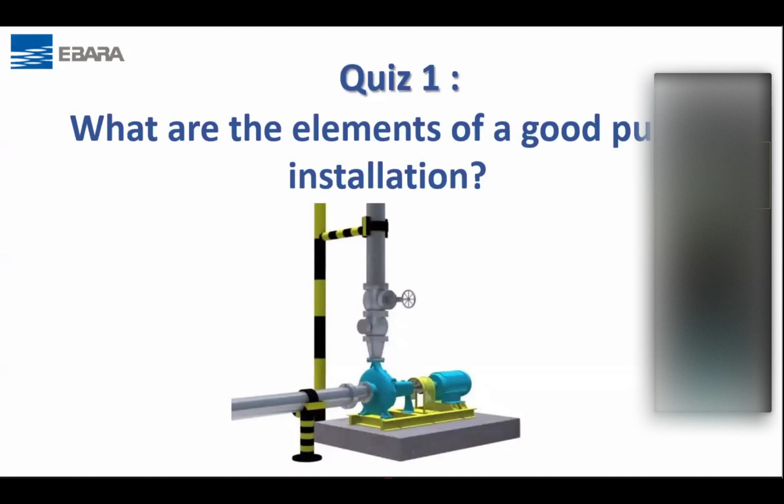Now you can see an example, or rather a clue here as to what makes a pump installation. So now let's go to the topic. When it comes to the correct installation for a pump system, there are 3 important points to take note.

Okay, the first is what we call the pump foundation, and this is basically the support for the pumps that you are installing. Secondly is the piping arrangement and how the pumps are connected to the pipes, both suction and discharge. This is also important in the whole pump installation scenario to ensure your pumps will run well.

And thirdly, as what you answered, pump alignment - that basically means how the pump connects to the motor. So these 3 factors, when done correctly, will allow your pumps to have the best conditions for its performance and ensure that it will perform at its peak efficiency. Correct and proper pump installation practices can mean the difference between a pump that gives many years of trouble-free operation or one that requires constant and repetitive maintenance - you end up keep having to maintain or service the pumps very frequently because of poor installation.

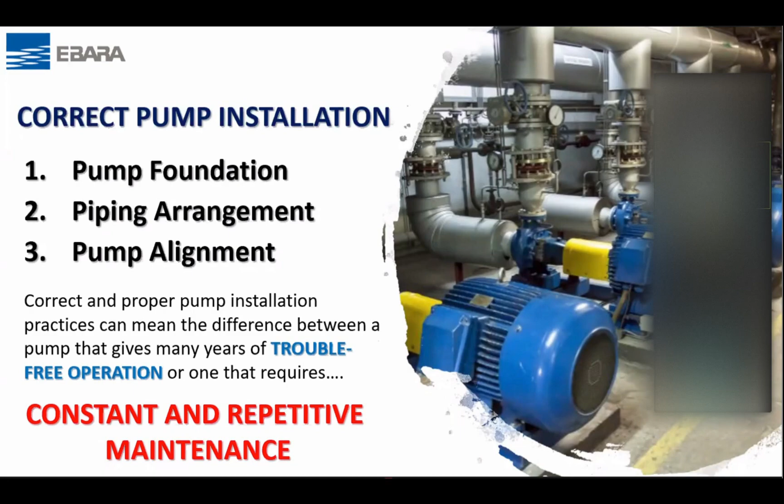Now let's go a bit deeper, let's start with the pump foundation. This is an example of one of our installations in one of the water treatment plants. There's a simple saying: a good house must be built on a strong foundation. This is the same for a pump, and even more so, because the pump generates dynamic outward forces in its operation. Therefore, it is important that the pump must be well supported.

Now let's look at what happens when a pump is running. When a pump operates, due to the centrifugal action of the pump, there are many forces and thrusts at play. The pump is subjected to centrifugal forces when the impeller is turning, and at the same time, the liquid action generates both radial and axial thrust from the pump. All these forces and thrust have to be taken up somewhere.

Now, in our last two webinars, we talked about Newton's laws of motion, and basically, as long as there is an action, there is a reaction. So this is where the reaction of the forces from the pumps come into play. Whenever there is a centrifugal force acting, there will always be a reaction acting towards the motor, which is the axial thrust, as well as the radial thrust.

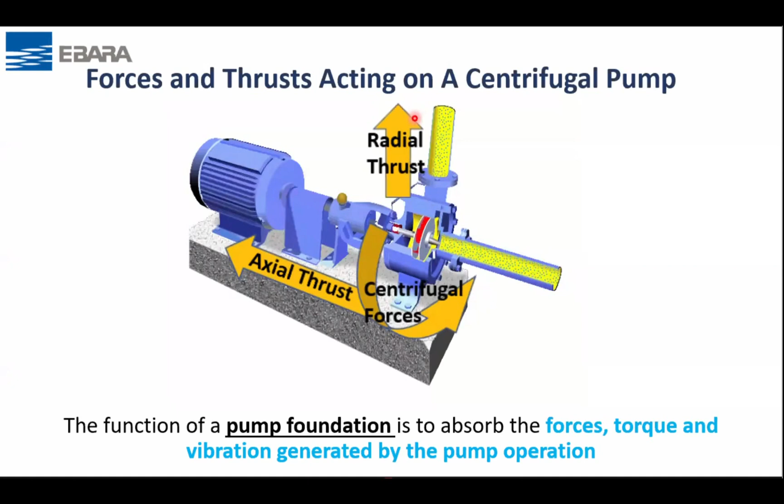Horizontal pumps such as end suctions, split case, or horizontal multi-stage types of pump should be mounted on a strong steel base plate supported by a strong concrete foundation, like what you see in some of the pictures here. The steel base plate is like the feet of the pump and motor assembly. It has to be designed to take up not only the weight of the pump, but also allow the whole assembly to be carried or transported around.

Now, you may ask, can the steel base frames support the pumps without the need for a concrete plinth? I'm sure you have come across some installations where there was no concrete foundation and the pump is just mounted directly to the floor. If the pump is light, such as a small close-coupled pump or a small vertical multi-stage pump, then it can be mounted directly to the floor. However, for horizontal style pumps, a good foundation is required to absorb these dynamic forces as well as ensure that vibrations are not transmitted to the floor structure.

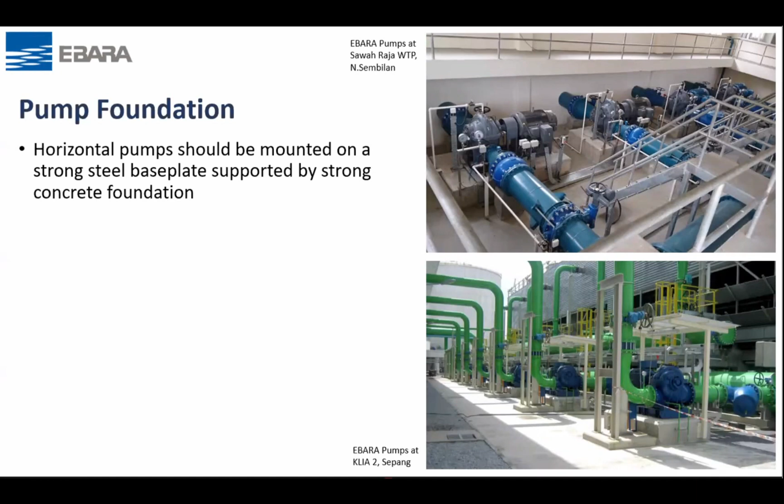So the rule of thumb is that the concrete foundation must be around 5 times the combined weight of the pump and motor to effectively absorb the dynamic forces. This can be calculated easily by assuming a concrete density for the plinth of around 2,400 kg per cubic meter, and from there you can determine the size and height of the foundation easily with this method.

And not forgetting, always design for ample working area around the sides of the pump and lifting tool facility also, such as a chain hoist and even cranes for larger pumps for future maintenance works. You can see from the pictures in the slides some of the good installations in projects we have supplied, and I would say this is very commendable.

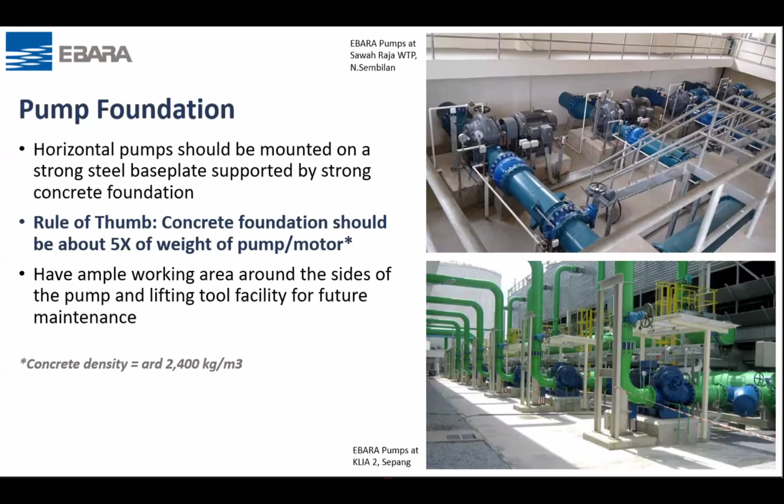Now, another important consideration, especially for pumps that are inside a building, is the isolation of vibrations, which can affect the surrounding areas and in worst cases transmit through the pipings. These vibrations can create cracks within the wall and floor if it's too much, and also create leaks in the piping system over a long time.

Therefore, inertia bases and spring isolators like what you see here in the picture can be used to counter these effects. And in some locations where there could be seismic movements—meaning not quite an earthquake, but places where there are bound to be some seismic activity—for example, if you are designing for a high building in Kota Kinabalu, which had some cases of minor earthquakes before, these isolators will definitely be required.

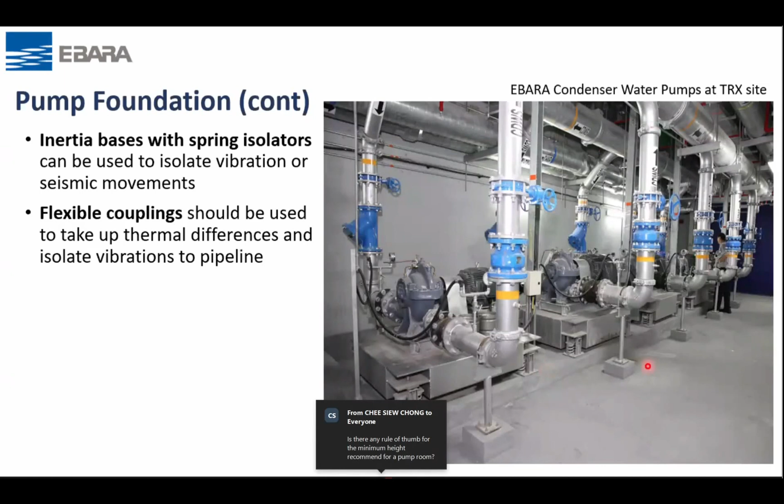Flexible or expansion joints are also a good method to isolate some minor vibrations from the pipe as well as compensate for thermal differences. There are quite a lot of types of these, so it is also recommended to apply them to your piping system. Inertia bases and isolator springs have to be sized against the weight of the pump, and this is a very specialized calculation, so there are specialized suppliers for this type of product. We will not cover this in detail here.

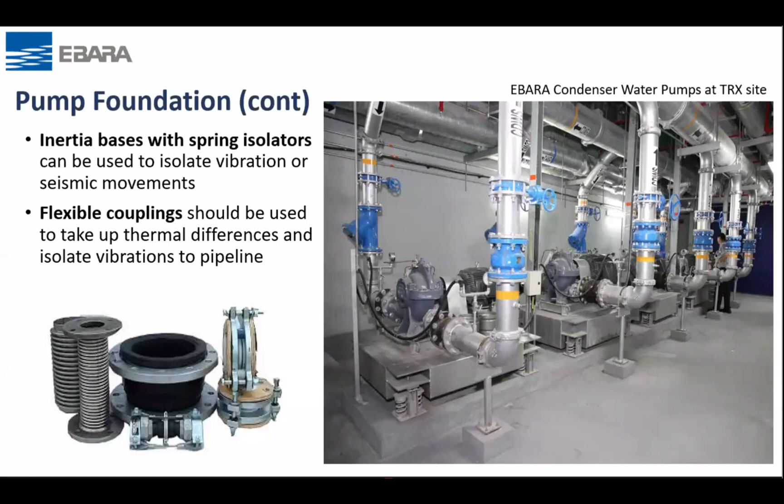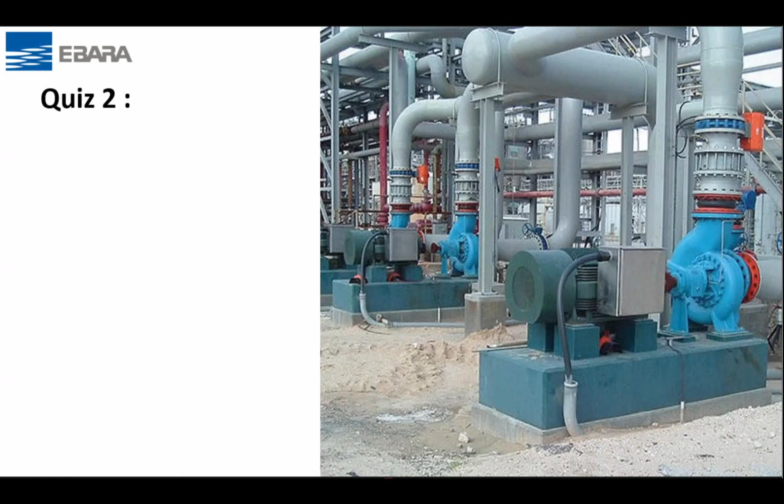So the next quiz, this is to enhance your understanding. You see from the picture here a pump facility that is still under construction. What should be the theoretical load mass for the concrete foundation plinth of a pump and motor that weighs around 1,000 kg or 1 ton? Anyone have any good answers?

Yes, very fast, thank you. Who got the first answer? 5,000 kg? Muhammad Ezwan. Okay, thank you Muhammad Ezwan for listening. You got the answer right.

So it should be around 5 times the weight of the pump and motor. And if you were to calculate the size of the plinth, you just divide by 2,400 and you get about 2.1 cubic meters. So with the height and the length, you can determine the width and length, or determine the height of the plinth. This is just a rule of thumb calculation—there are a few other factors, but generally with this method you can get the plinth size. So thank you, Muhammad Ezwan.

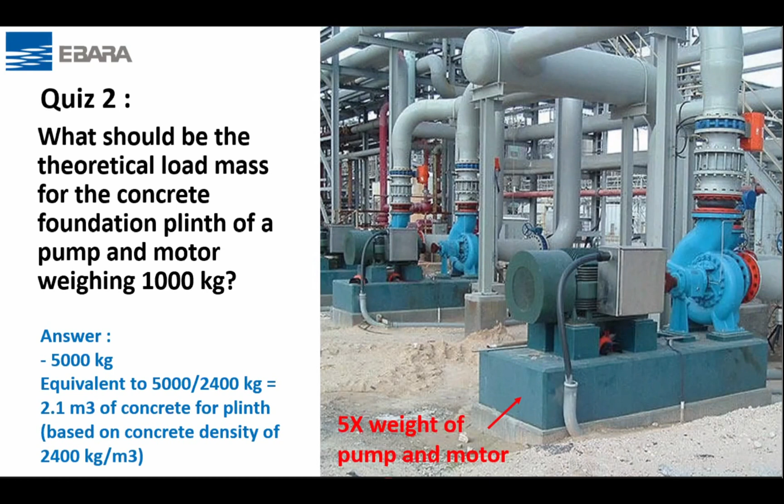Okay, so that's the answer to quiz number 2. Now next is what we call good piping arrangement. We have covered good foundation, now we talk about good piping arrangement. So what do we mean by this? Basically, how the pipings are connected to the pump will affect how the pump performs.

At the suction side, the pump needs to have a good intake of the fluid so that it can have the capacity to produce the flow and head required. And at the discharge, there should be no restrictions or any form of obstructions which can cause a large pressure loss or even back pressure acting back on the pump. Sounds simple, right? But this is where a lot of things go wrong. So let's look at this in more detail—what do we mean by maintaining an optimal pump suction condition?

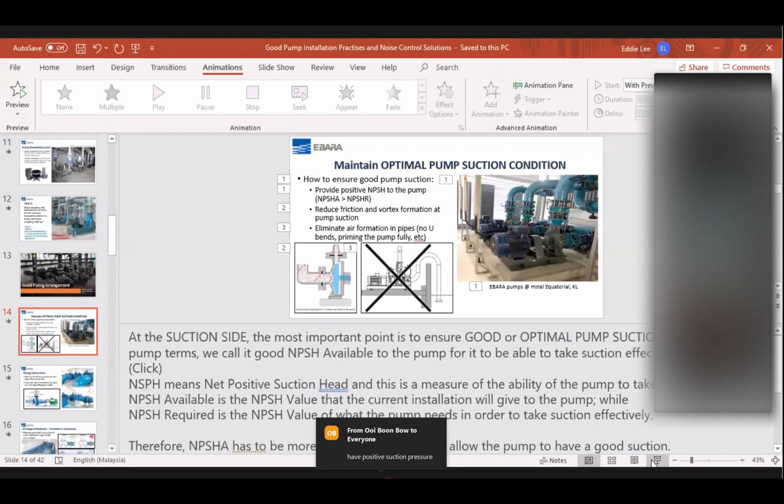So maintain optimal pump suction condition. At the suction side, the most important point is to ensure good or optimal pump suction condition. Now, in pump terms, we call it good NPSH. NPSH means net positive suction head. So basically, it is a measure of the suction ability of your pump.

But NPSH has two forms. One is NPSH available, and that is basically the NPSH value that the current installation of your pump will give to the pump. But at the same time, every pump has its own NPSH required, which you can check from the pump curve. NPSH required is the NPSH value that the pump needs in order to take suction effectively.

So with this understanding, the available NPSH in your installation or pump system - meaning your piping, your water level whether it's positive or negative, your pipe length and so on - will affect the NPSH available given to the pump. The available value has to be more than the required value in order for the pump to take suction effectively. Apart from that, it's also important to reduce both friction and vortex formation at the pump suction.

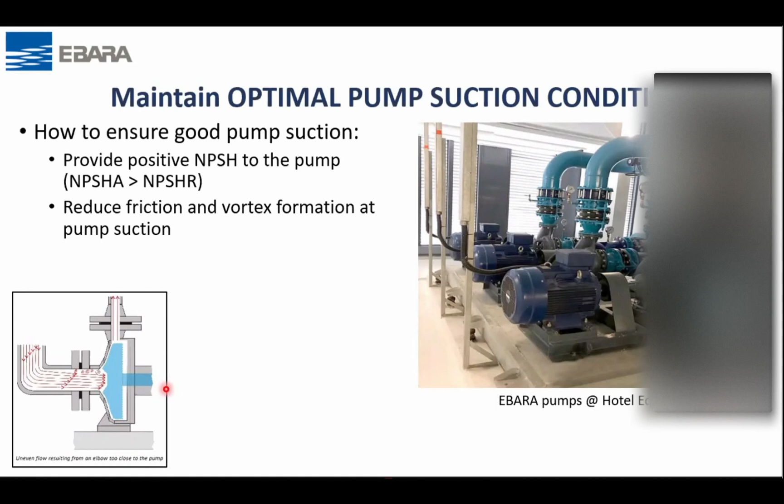One of the common problems is when you have an elbow just at the suction of the pump with a very sharp or small radius. What can happen is a lot of turbulence before the suction of the pump, which reduces the NPSH available and causes poor suction condition, even cavitation. If you have a very long pipe from your tank to the pump with high friction losses and a small pipe, that is also a condition that can cause poor suction.

And not only that, air locks - it's important to eliminate air formation in pipes. One of the problems people don't realize is that if you have a U-bend before the pump, it creates an airlock issue. So it's very important that a centrifugal pump must be fully primed to ensure that the pump takes suction at all times.

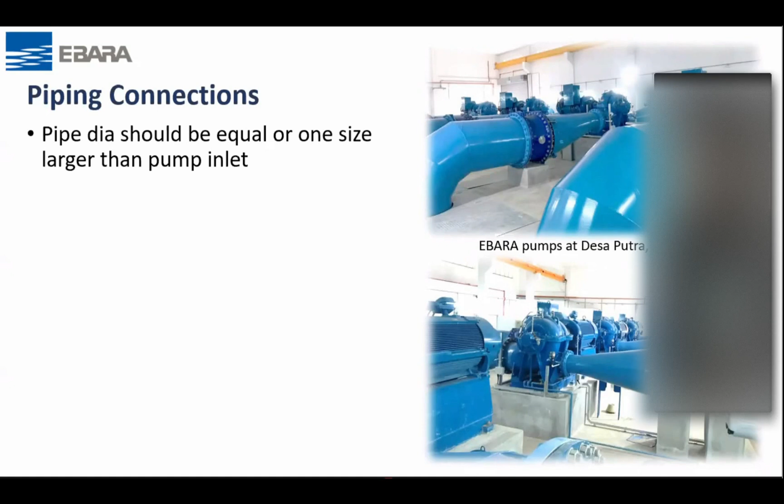Now let's go to the piping connections. After foundation and piping, now we talk about these piping connections. Pipe diameter should be at least equal or one size larger than the pump inlet - it can never be smaller, because when the pipes are smaller than the pump inlet, that is where the pump will face suction issues. The pump's inlet and outlet have been designed by pump engineers to have a certain flow into the pump, so you should never compromise on that. In short, pipe diameter should be equal or one size larger to allow for ample water supply, and also ensure the pump is not strained by the pipes and not supporting the pipe weight itself.

You can see in many cases when the pipes are installed or connected to the pump, instead of having a free connection, the pipe is actually straining to hold against the pump or vice versa, and that creates a lot of pipe strain. So all pipes must be supported by pedestals or even pipe hangers if they are running below the ceiling, and not let the pump take the weight of the pipe.

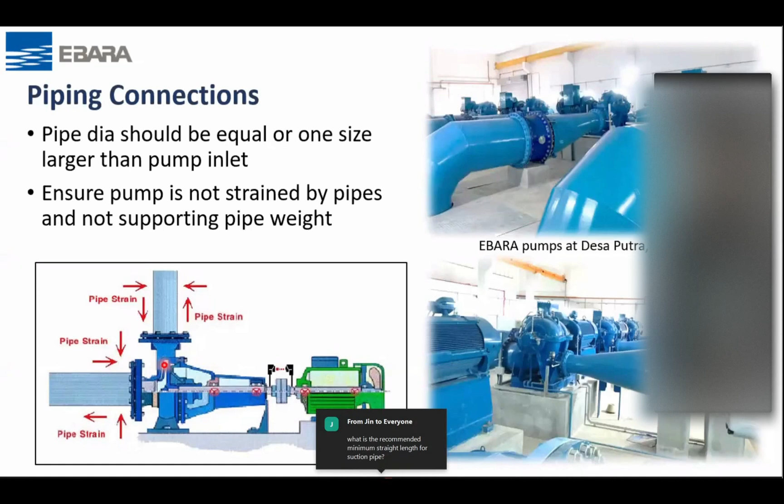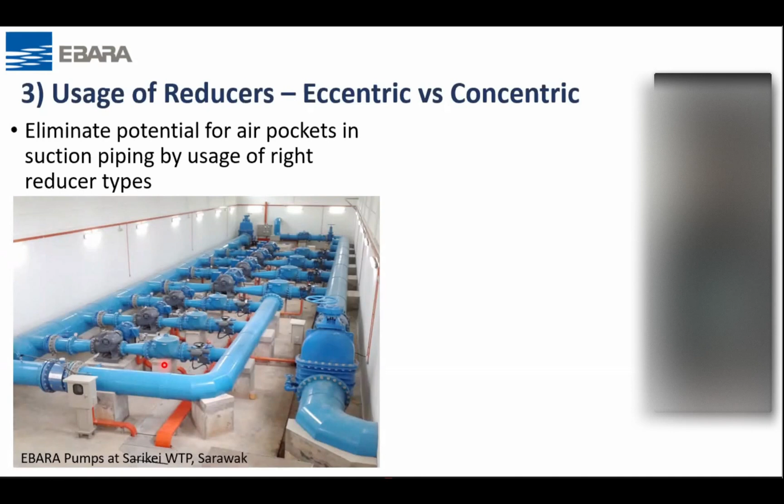Then the next is also on reducers. Now, in a lot of supply systems or plumbing systems, reducers are used. So it's important that when you use such reducers, there are both eccentric and concentric reducers, and there is a right way and a wrong way to use them.

So you can see from this installation here how the correct way of using both an eccentric reducer and a concentric reducer. In this case, for an eccentric reducer, the slope must be at the bottom part, not at the top. Because if you put the slope on top, there will be a risk of air formation in the pipe, which can affect the suction of the pump.

In another case, if your pipes are coming from below, then the slope should be below. But if your pipes are coming from the top, with a very big radius elbow, then technically the slope part of the reducer should be on top. So this is just some of the theoretical or good design practices of using both eccentric and concentric reducers.

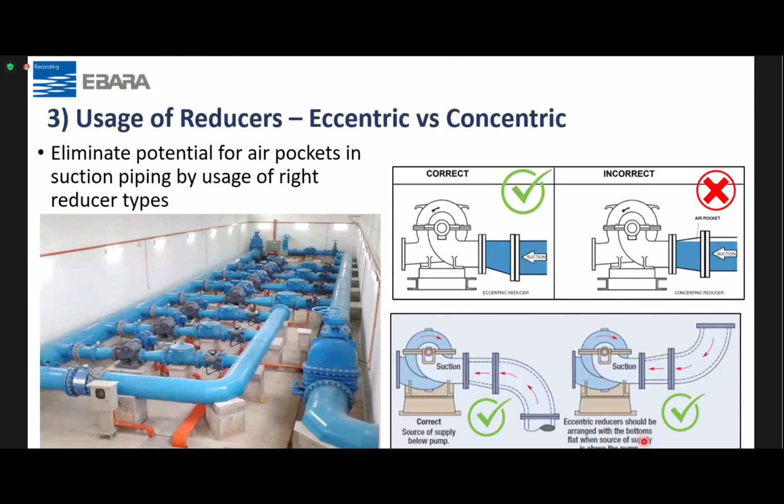So that's on piping arrangements, some of the pointers. Now we go to the next topic, which is on good pump alignment. This is also very important because all rotating equipment needs to be balanced as well as aligned to the motor correctly, not just aligned radially but also axially, to ensure that it rotates smoothly at high speed.

This is the same like your car. If your car wheels are not aligned properly, you will always have a little bit of vibration in your car when running along the highway, and the road holding will not be good, and you may not even be going straight if you let go of your steering wheel. So that's a sign of not good alignment.

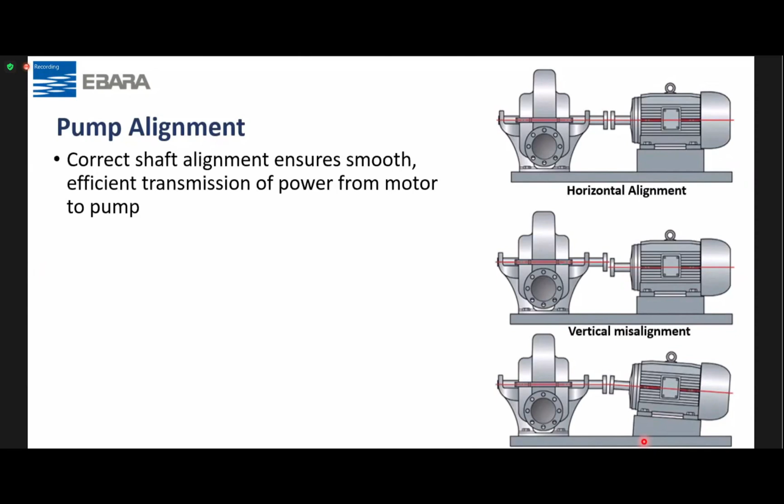But a misaligned or badly aligned pump and motor will result in three things. Number one, vibration, which leads to noisy operation and causing pipe strains. And in the worst case, bearing and internal parts damage. So in short, to avoid this, both motor and pump should be aligned properly and periodically in all your installations.

Now, there's a few types of alignment from what you can see in the picture here. There's horizontal alignment, where the alignment of shafts is in the horizontal plane. And there's also vertical alignment or misalignment, where the shaft of the motor and the pump is misaligned and shifts from each other. This is usually caused by a difference in the height of the pump and the motor.

And angular misalignment, you can see from here what happens is that it could be the pump or the motor tilted from one another, and from there misalignment happens. So the question is, when do we know the pump needs to be aligned? What are the symptoms that you can see or feel?

So let's just see a short educational video on this, courtesy of a specialist company that deals with pump alignment.

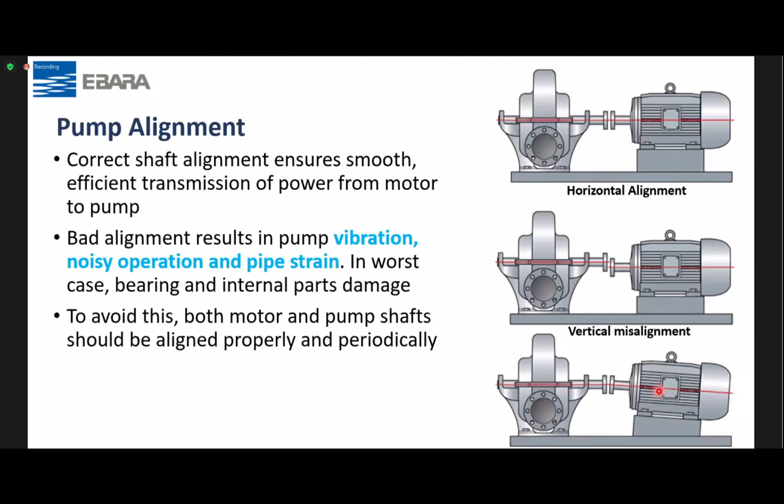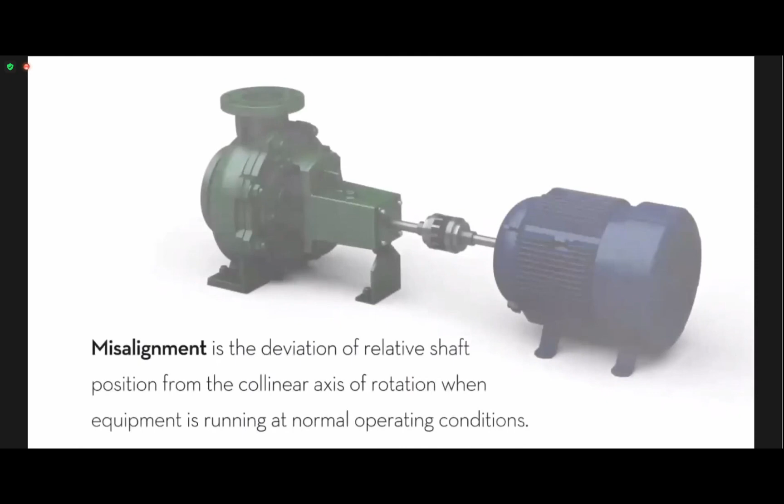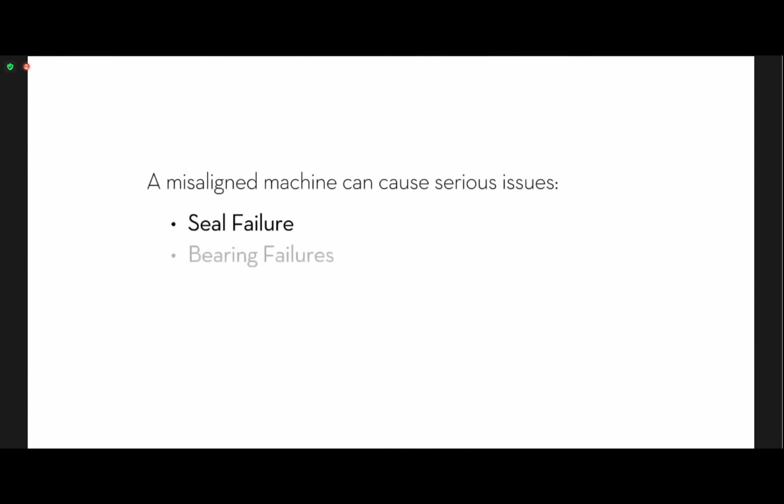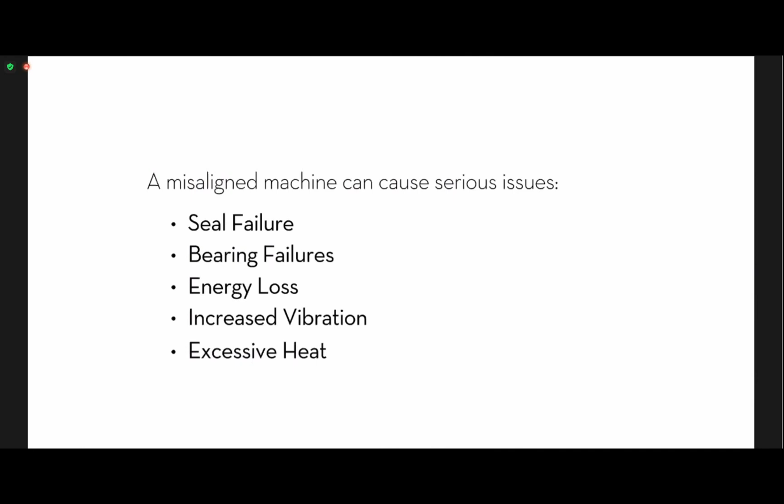So let's go to the next quiz now, and this should be quite obvious. Prepare your keyboards. The question is, what are the symptoms of bad alignment on a horizontal type pump, like for example an end suction pump? I want two answers, and I think I saw two: vibration and noise. Okay, who got the first one?

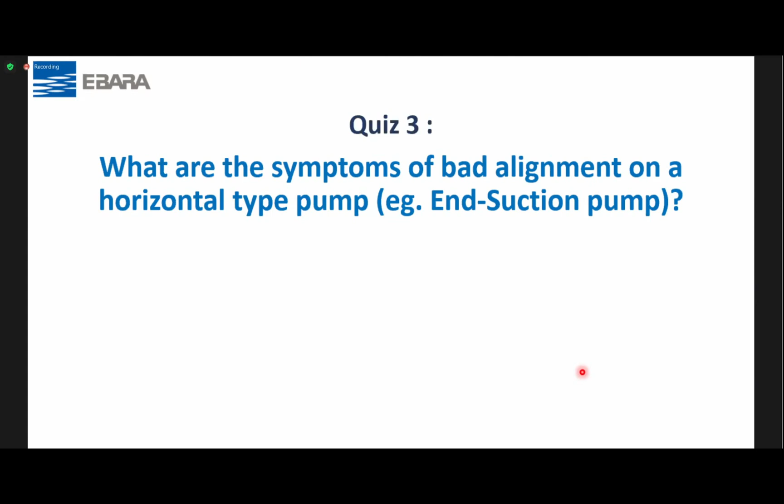So on that, we have covered what we call the essentials of a good pump installation. Now let's go to the next subject matter, which is regarding pumping system noise control solutions.

Now, before we go into this, let me just take a quick survey. How many of you all have come across this problem? Type yes in the chat column. That means either your client, maybe the building owner or developer, or even the residents themselves complain about the excessive noise from the pumps, because either their unit is near the pump room or maybe they have very sensitive ears, and even if they live further up, they can hear the sound. And sometimes it may not even be the sound of the pumps, but actually from the pipes, so you could hear chattering or water noise or even water hammer. So type yes if you have had this problem before.

Okay, naturally pumps are loud. Well, yes and no, but thank you for that comment. Are there a lot of yes? A lot, okay good. So how was the problem resolved? Can someone share, those who have had this problem, what happened, or what did you all do to solve the problem, or was there a solution at all?

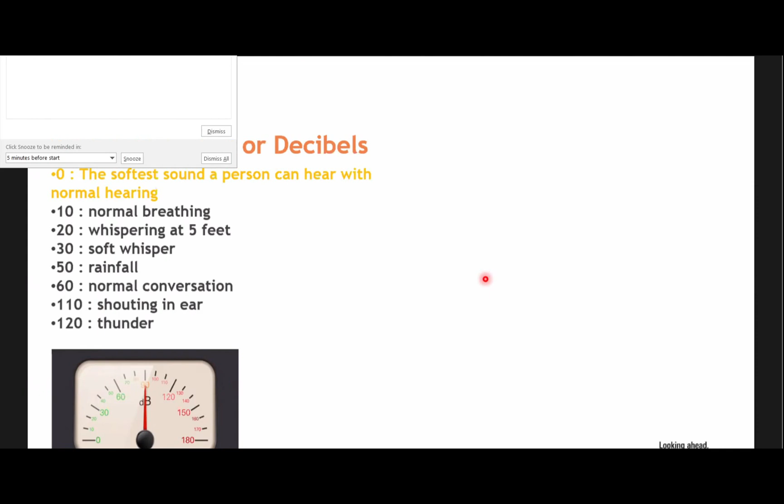So we can just go through this quickly. Your phone can become a sound meter. Just so you know, you need to apply this, and you can just do that to specify the loudness of a sound for your standard.

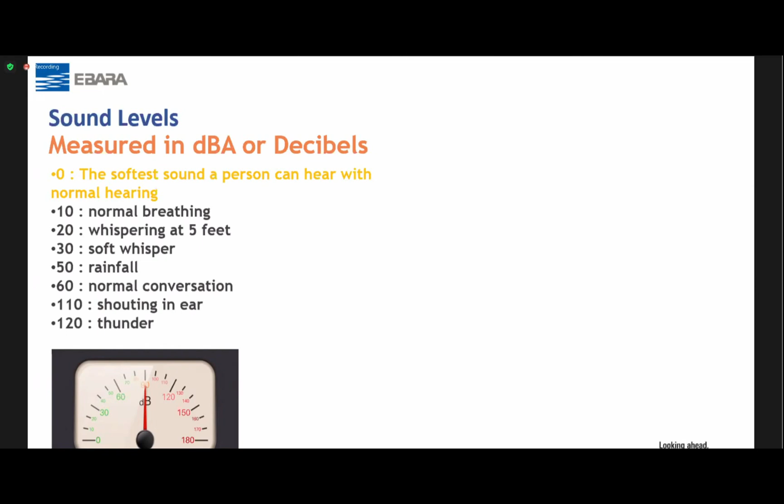So now you can really see here the different levels of decibel values, depending on your scenario, whether you're at home or at work, and whether you're using a washing machine or air conditioner.

And even here, I put it, if you are at home, for you men, if you have a nagging wife, then the sound level could be 80 dB. Or if you're in the office and your boss is very angry because you made a big mistake, it could be everything up to 90 dB.

So you get the idea, okay?

Basically, 20 dB, for example, is not double of 10 dB, but many times more, following the logarithmic scale. I will not go too deep into this, but basically it means that it is not a linear value. A sound measuring twice the level of another would actually in practice be many times the intensity level of the other.

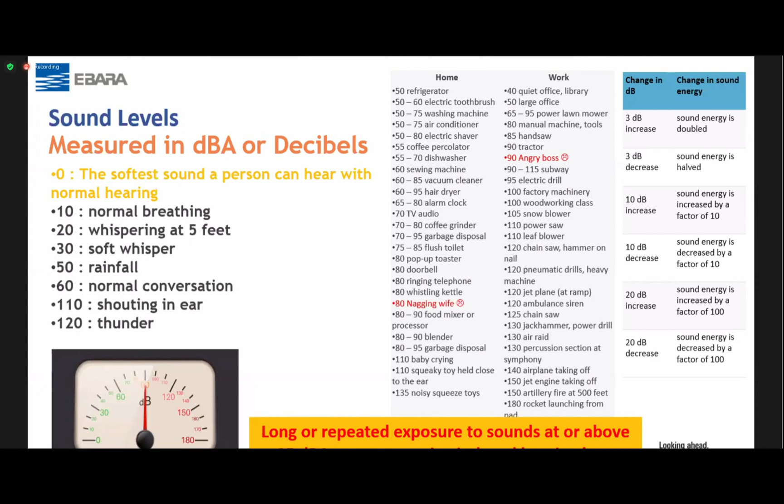But coming back to this, let's go into the next quiz. Who or what was the unit decibel named after?

This one I don't think you all will get it so fast. Anyone? dBA? No, Mr. Decibel.

Okay, yes, I got that, but you didn't get the full name, huh? I saw an answer there, but can you give me the full name? Alexander, that's not the full name either. There's a lot: Alexander Tan, Alexander Chong, Alexander... Yes, okay, we have to give this to Muhammad Kamaru, Alexander the Great. Oh sorry, I think you watched too many Netflix.

Alexander Graham Bell. So, yes, now...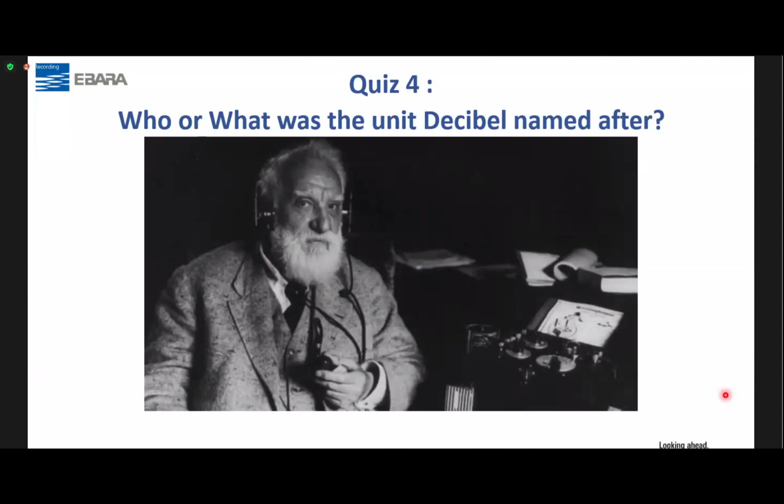Why or how was the decibel named after Alexander Graham Bell? Alexander Graham Bell, as you know, was a Scottish-born inventor. And of course his greatest work is the invention of something all of us have today, yeah? And that is your phone. Of course, he did not create the handphone, but he created the telephone.

Once he invented the telephone, engineers needed to be able to... after that he formed AT&T, and of course AT&T is one of the biggest phone companies in the world, at least in America in the heydays. I'm not sure about now, but once the telephone was created, engineers needed to be able to quantify these audio levels in telephone circuits.

And also measure the transmission efficiency of all the telephone facilities. So they had to create these measurement values. Bell Telephone Laboratories devised this sound measurement unit and named it Bell, in honor of Alexander Graham Bell, who invented the phone.

So that's just the story. But basically, the decibel is actually 1/10 of a bell, to give it more value.

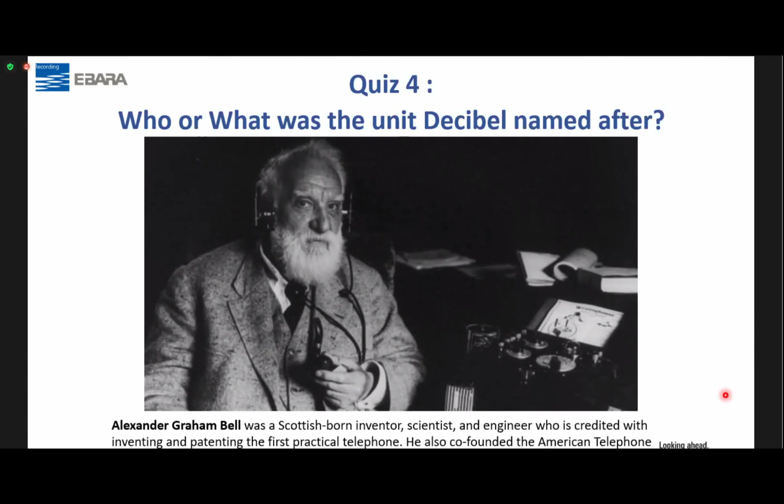Now, let's go back to the subject of noise. Picture this: you go to a pump room and hear a very high-pitched noise, or you could even hear it from outside. Or if you are unlucky, you bought a nice condo unit, but unfortunately it is nearby the pump room, and there is this constant high-pitched noise. I don't know whether you face that. So where do you think the sound originates from? Of course you know it's from the pump room, but the question is from actually where, because you want to treat it, right?

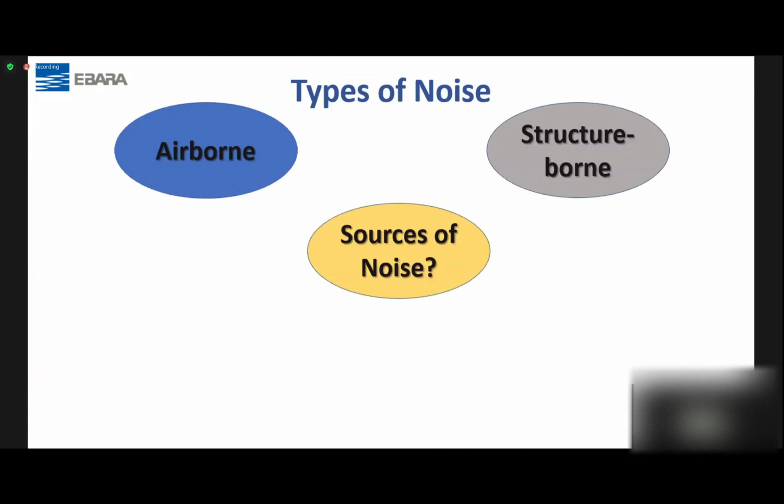So when it comes to noise identification in a building, there are two types of noise. It is important to identify them clearly so that the correct remedy or solution can be taken. The first is what we call airborne noise, which is the sound that travels or is transmitted through the air. The other type is structure-borne noise, which is usually the sound coming from the pumps or pipes, mainly caused by vibrations transmitting to the wall or structure. So in short, the two main noise sources are always either the pipe or the pump.

Now, why do I say pipe? Because usually you will also hear, especially if you live in a condo, or even if you go to a hotel, and you went to bed early and the person staying in the room beside you comes back late and starts bathing and showering, you hear this shh. That's actually the sound of the water pipes or water flowing in the pipes. That can irritate a lot of people also.

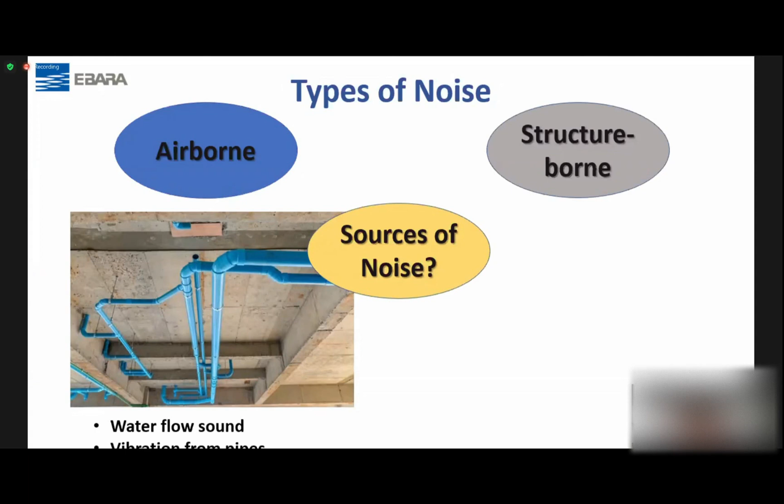Nevertheless, you can see from here, pipes also create sound, and that could be either from water flow or from vibrations. Vibration can be caused by bends in the pipe, water hammer, or even pipe chatter. And from the pump, it will come from either the pump running noise, which is usually a humming noise, or a high frequency noise from the motor fans, or in some cases, pump vibration, which is transmitted through the structure. We will try to address this in the next few slides, to go into a little bit more detail.

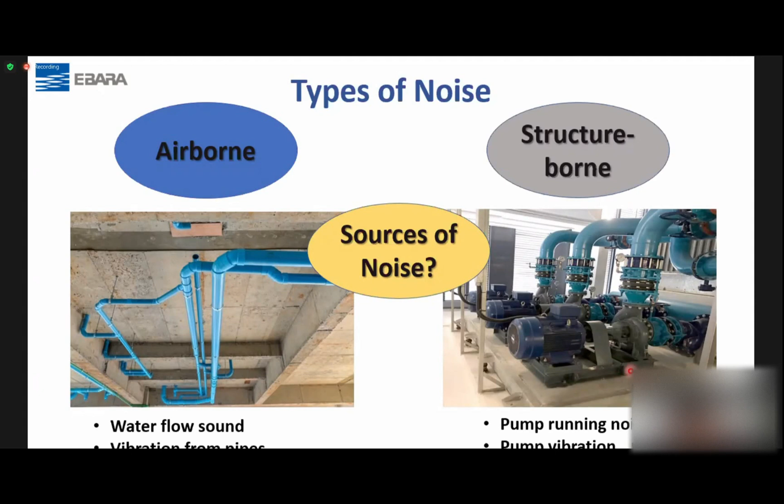So when we talk about airborne noise, what could be the problem? Now the sound is usually in this case very high pitched. It goes like that. So there are a few possibilities.

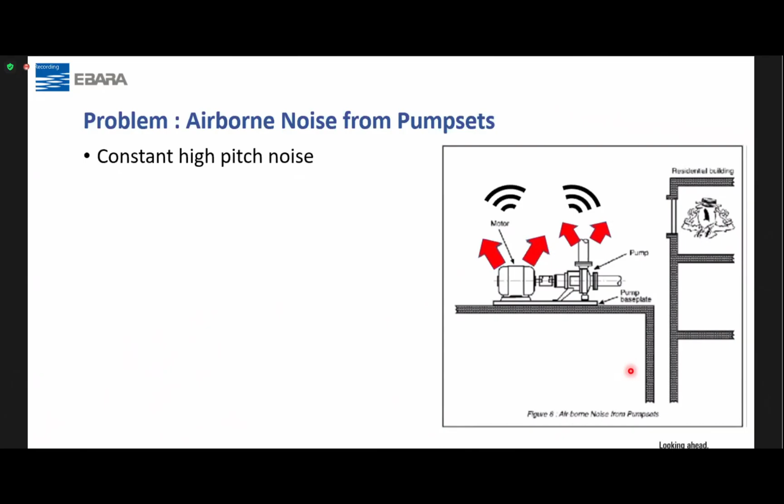If you hear a constant high pitched noise, then it is probably from worn out bearings from either the pump or the motor. But if it's not a high-pitched sound, then it's just the mechanical humming of the motor rotation.

Now, sometimes you hear this very high-frequency sound if the pump is driven by a VSD. That is basically sound generated from what we call over-harmonic frequencies, generated by these VSDs driving the booster pump or the pumps that are in use. This is actually an electronic noise, and it doesn't happen to all VSDs, but to some VSDs where due to the switching frequency at the rectifier, it creates harmonics and some EMF interference. Where there are no harmonic filters inbuilt into the VSD, this sound usually can appear.

So in such a case, when you have either worn-out bearings or harmonic frequencies, you have to identify them, and there are mainly two solutions. Either you replace the worn-out bearings, and of course you have to ensure that the pumps and motors are maintained on schedule. That's the key action if the sound is the mechanical high-pitched sound. And if it's an electronic sound coming from the VSDs, then you add a harmonic filter into the VSD, or in some small VSD, you probably need to change the VSD to another brand, because not all VSDs are built with harmonic filters.

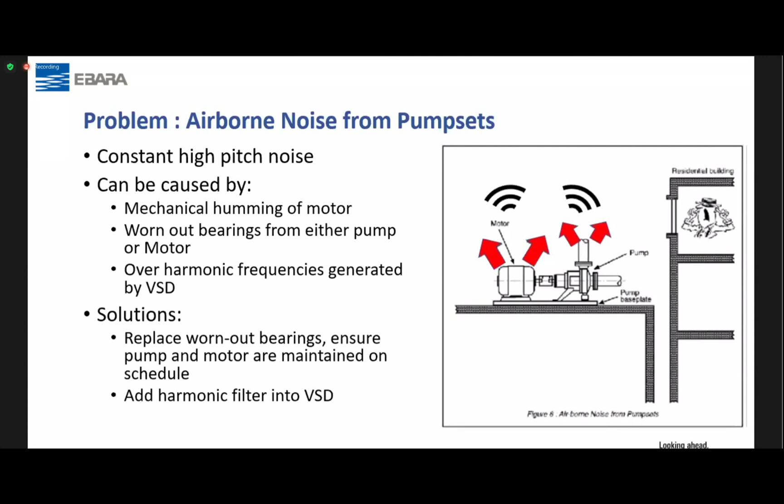So that is one of the cases of what we call airborne noise. Okay, next is what we call the structure-borne noise. This is basically a low humming noise from either the pump or the motor, accompanied by a slight vibration when you feel the pump.

You know about this, right? So what's the solution for this? It's also pretty obvious.

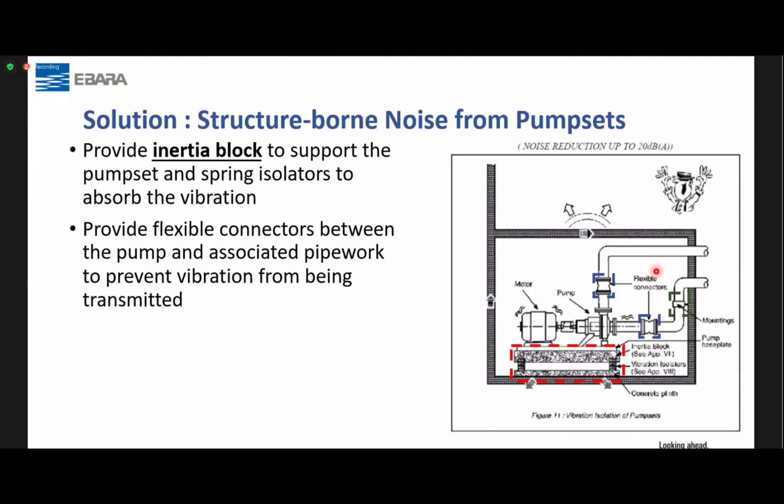Number one, of course, provide inertia blocks to support the pump set and spring isolators to absorb the vibration. First, get rid of the vibration, because that creates, or is one of the sources of the sound issue. In addition, provide flexible connectors between the pump and the pipe work, so that this vibration is not transmitted to the pipes. If you have pipes hanging below the ceiling, support them with spring hangers, and if you have pipes that run along the wall, ensure that these pipes are securely mounted with proper pipe mountings.

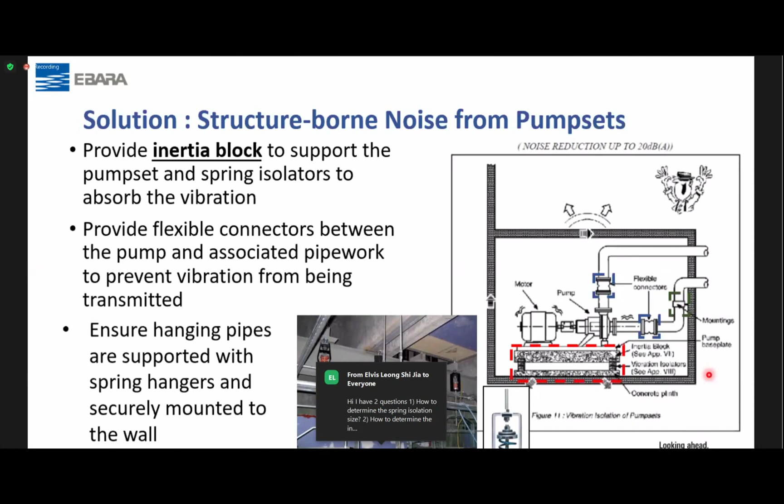So just now someone said sound barriers. In some cases, you may need to create a sound barrier if your pump room is situated very close to occupants or residential units, especially for high-rise buildings with intermediate pumping floors. Today a lot of condos and high-rise apartments have intermediate pumping floors where you pump in two stages, so you need pumps at these intermediate floors. That's where the pump room is, and sometimes it's just below a space too, so not just at the same floor, but also the floor above and below. And then you can hear the sound of the pump.

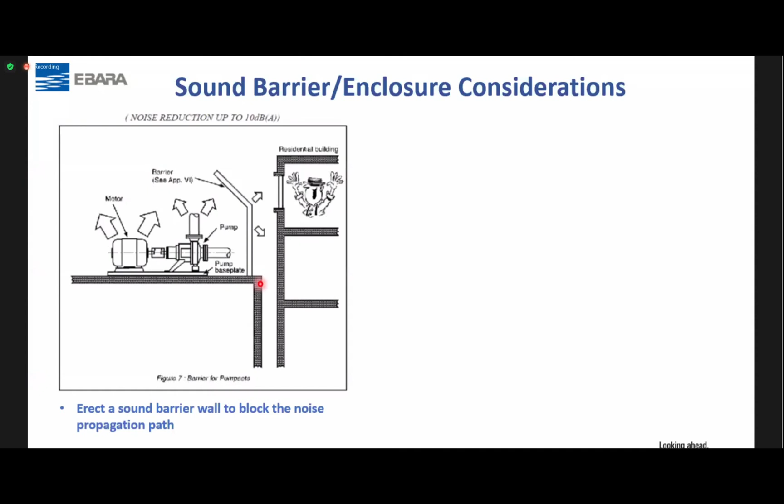A much more effective solution is to fabricate a complete enclosure either around the pump, or use sound absorption materials on the pump room walls. When you do that, you need silencers at the outlet and inlet, because sound can still travel from the ventilation points. You need to add silencers so that all these are able to contain and absorb the noise energy radiated from either the pump or the motor. An enclosure like this also requires proper ventilation to ensure minimal heat build-up.

Not forgetting the pump room door, it needs to be soundproof. So if you have such an arrangement or installation, you can actually reduce the noise level effectively by as much as 30 dB.

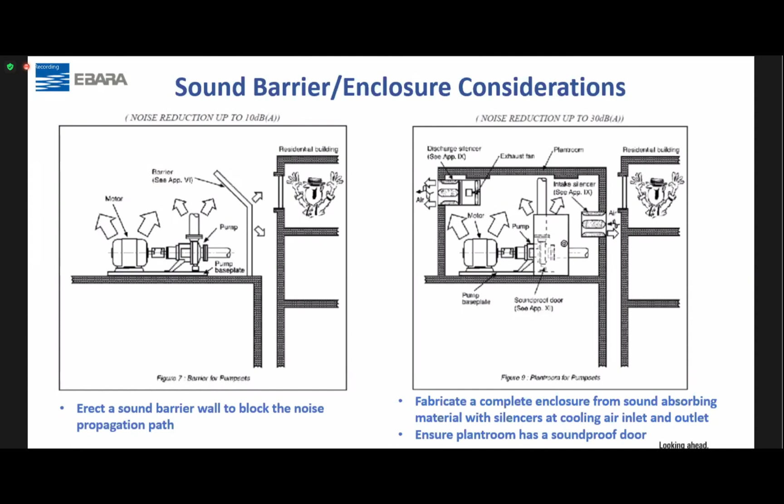Okay, now in summary, when we talk about treating building noise, there is a very apt and effective saying which can be applied to this problem. And I'm sure you all know what the saying is.

So, prevention is better than... what? Better than injection? Or... anyone? Or sleeping already?

Yes, so the word is cure, not vaccination. So, prevention is better than cure. Now, what do we mean by this? Most of y'all, especially the men, you all have a nice car.

So when you look at a car as an example, when we treat noise problems, it has to start from the very design itself. This has to be properly thought out during the design stage, before all the equipment is installed and the pipes are laid. If you look at today's cars, everybody wants good or low NVH. Do you all know what is NVH? I think some car lovers, or if you read a lot of these car articles, then you know what NVH is. Anyone? What does NVH stand for?

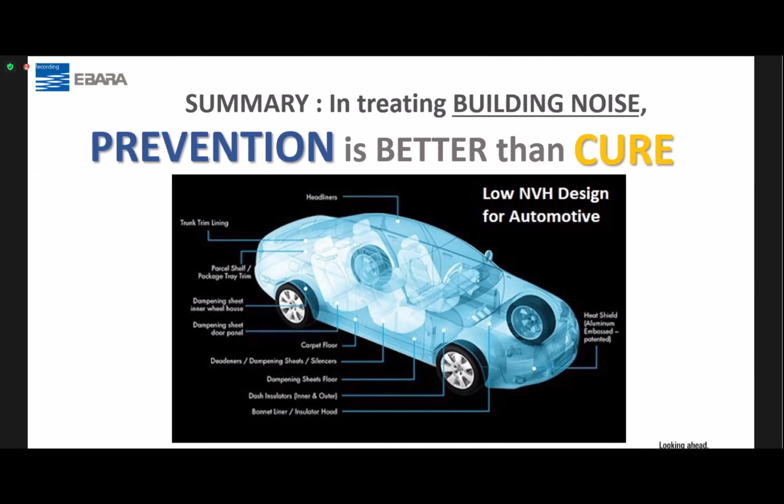But after that, after paying maybe a few thousand ringgit to put all this in, you get very little improvement with these aftermarket products, because the materials can only absorb some of the sound, some of the noise, but not prevent the cause of it. So in short, when we talk about treating noise, it begins right from the design process itself.

Which is four main things: number one, equipment placement, selection of equipment, good maintenance, as well as right plumbing design.

And if you do not have this, once the building is done and the noise issue starts appearing, then you can only look at some cure examples, such as sound barriers or absorption materials that we talked about, and even putting pump enclosures, or redesigning the pipe, or even changing the pump. And of course, an expensive solution is to add inertia blocks and isolators.

So that is why we say, if you look at it, all these cures cost a lot more, but result in not much gain.

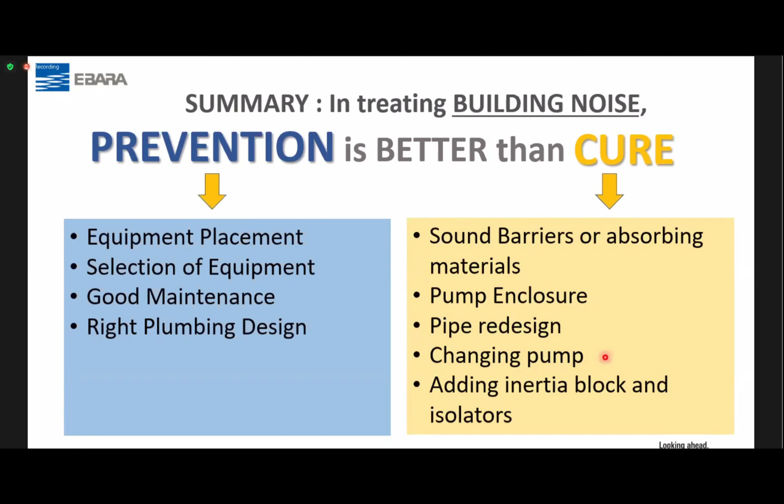So in short, just to summarize, when we come to pumping systems, when you design and plan against noise problems, there are four major points of consideration that you should take note of in your design. Number one, of course, is what we call equipment placement. So a few pointers here.

Number one, the equipment should be placed in a plant room with very thick walls. So you have to increase the size or thickness of your pump room walls if you want good sound insulation or noise insulation, and put it as far away from occupants as possible.

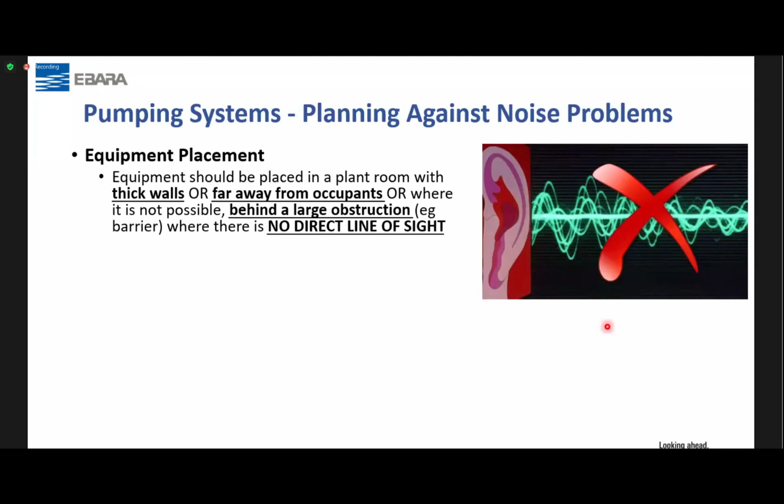And if it's not possible, because of your architectural design or the location, then it has to be behind a large obstruction or barrier where there is no direct line of sight. Direct line of sight meaning it should not have a direct line to where your occupants are going to be. Very important - consideration number one.

Then, of course, the selection of equipment itself. A quieter equipment may be more expensive than a standard equipment, for example, like silent running pumps. But in the long run, it is more economical to purchase quieter equipment than to reduce noise by modification or with noise control devices after the purchase.

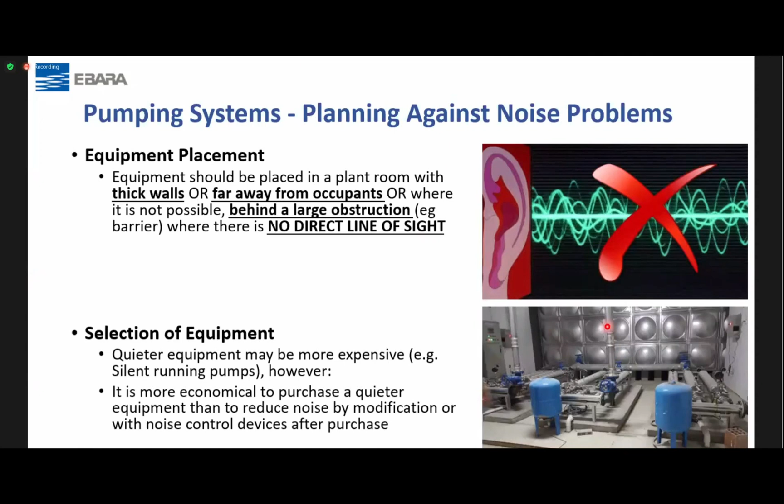So we showed you some examples of how all these vibrations can be eliminated from your plumbing design using pipe hangers, using flexible joints, using vibration isolators and isolator springs and so on.

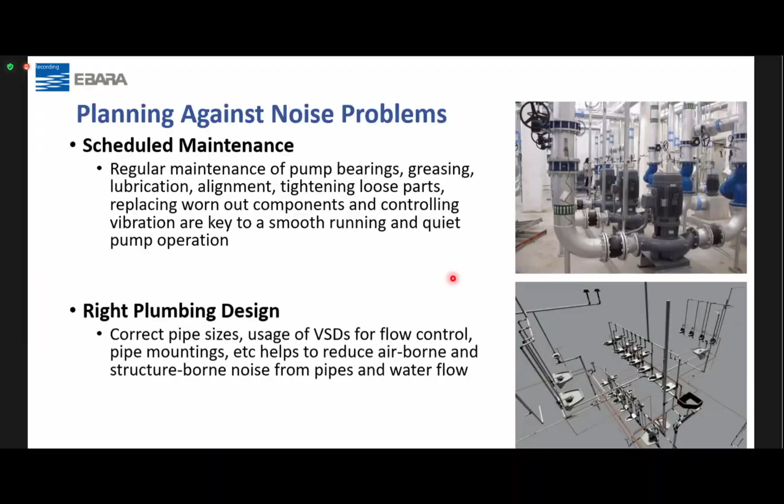So we talked about this a little bit. Now, in case you want to delve into design for a building which requires good silent operation, we have introduced two new pumps for this particular application.

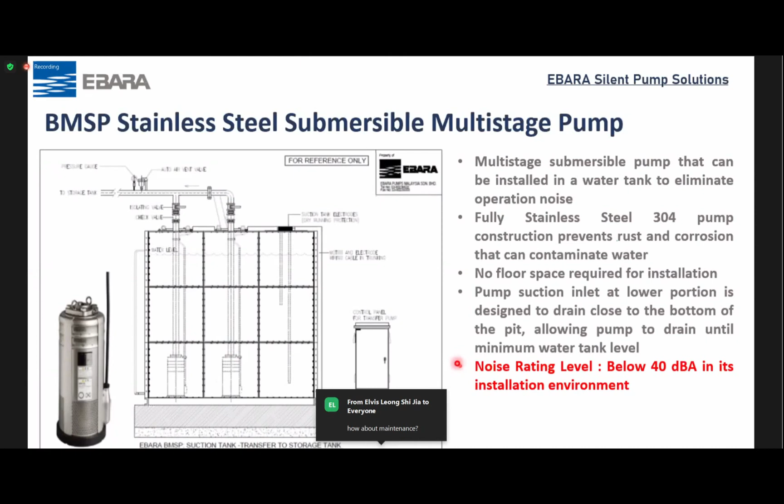Secondly, for pressure boosting systems, if you are having noise issues, or you want a pump that runs quietly, especially for projects like hospitals, high-grade offices, or condominiums, you can consider our E-Tube silent booster pump system. You can see some examples over the next few slides. It acts like a normal pressure boosting system, except the pumps are inside a stainless steel tube, so you actually do not hear any sound at all from these pumps. Very, very little sound.

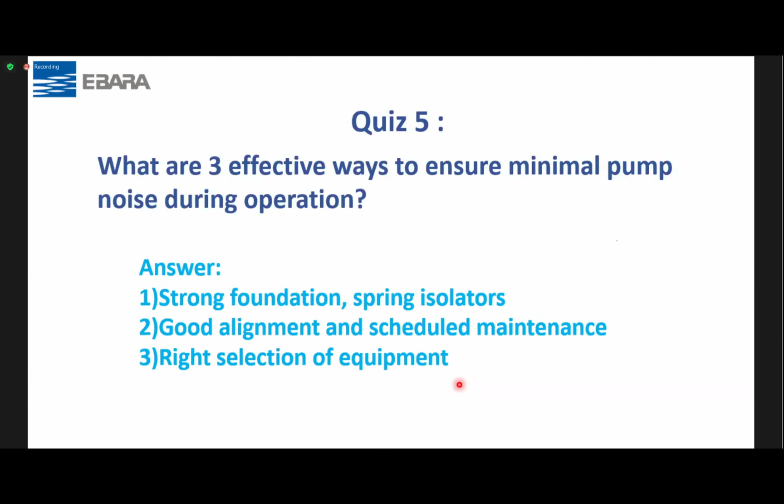Call my boss again, move up - okay, you all are thinking too much now. Pump enclosure, sound barrier - okay, that could be the cure. Fabricate a complete enclosure, but we have mentioned all that. So all that failed, that's what I'm saying. Reset again - okay, see, the problem with you engineers is that you all overthink a problem, that's the problem with engineers. You give them something simple, but they overthink and give you a lot of answers. Let me double check again. This is the solution, okay. Use earplugs! Okay, nobody got that. Okay, so it's just a joke, yeah.

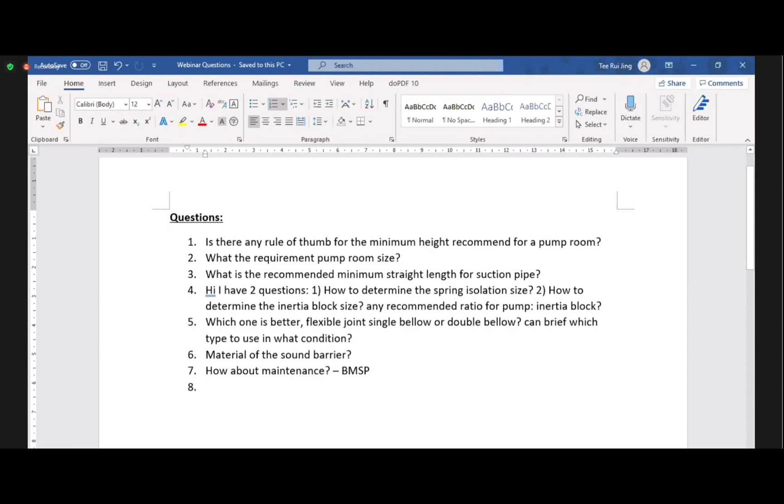Yeah, but then the incoming size, they didn't specify what is the size. Is it talking about cold water or the rainwater? Okay, so not 7 questions anymore, because the drawing doesn't show any. So we have 7 questions here, and if you have any more questions, you can continue to type it there.

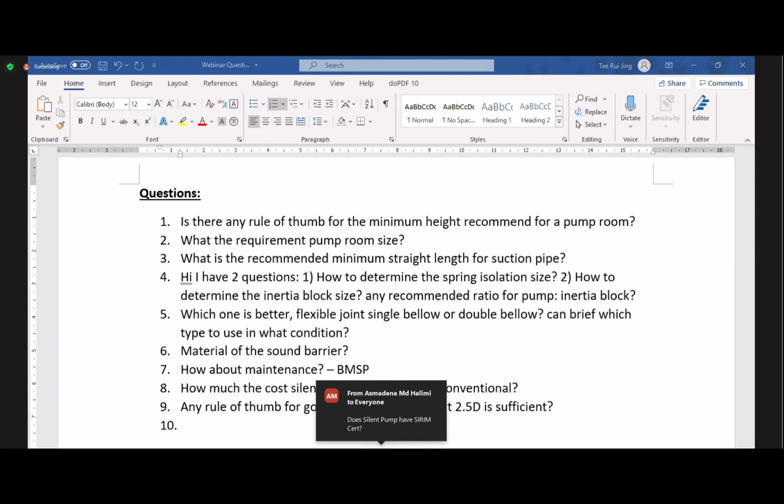So let's go to question number 1. Is there any rule of thumb for the minimum height recommended for a pump room? Good question. There is no rule of thumb, but generally your pump room has to take into account a few considerations. First, ventilation is important. You have to ensure your pump room is well ventilated, so space is important to ensure natural ventilation in this respect.

Secondly, of course, is the facility to do maintenance. Because if you have big pumps, you need to ensure that whenever you need to maintain them, you need a lifting device of some kind, whether a simple hoist or even a crane, like in a water treatment plant. So these heights have to be allowed for. And of course, a few other things like general lighting, besides ventilation. So there's no actual rule of thumb, it depends on the type of pumps you are using.

Yeah, but I think in general, if you are in a basement, you easily have maybe 3 to 4 meter height, that should not be a problem for small pumps. And if you have a pump house on the roof, then at least it should be minimum 2.5 to 3 meters, just to ensure proper ventilation and lighting for the pump and good working space. Correct. So number 2, the requirement for pump room size, more or less we answered the same. You must have enough working space around the pump, that's important, and ventilation.

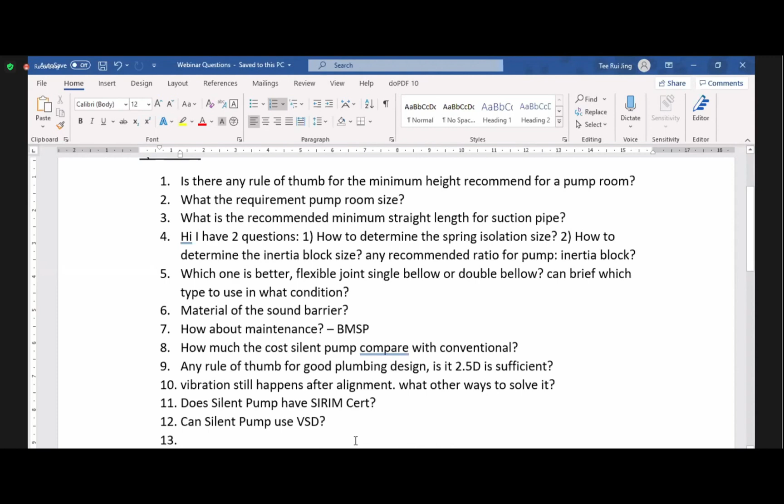So number 3, what is the recommended minimum straight length for the suction pipe? Okay, technically it should be around 5 times the suction diameter of the pipe, of the pump. So that means if your pump is 4 inches inlet, then it should be at least minimum 20 inches straight pipe to the pump. That will allow lesser turbulence. The longer the better, but not too long, because it creates too much friction losses. So just remember that rule, around 5 to even maybe 10 times maximum.

Number 4, I have 2 questions: how to determine the spring isolation size and how to determine the inertia block size. These are 2 very common questions, and any recommended ratio for pump inertia block. When we talk about a concrete plinth, it should be around 5 times the weight of the pump and motor combined. But when you add an inertia block or springs, you're basically able to reduce the plinth size. Unfortunately, the calculation for both the springs and the inertia block is quite technical, with heavy formulas that specialized suppliers use. We are not experts in this, so we are not able to advise you because it is out of the scope of our pump system. But if you need more information, we can point you to some suppliers in this field who can give you a better calculation.

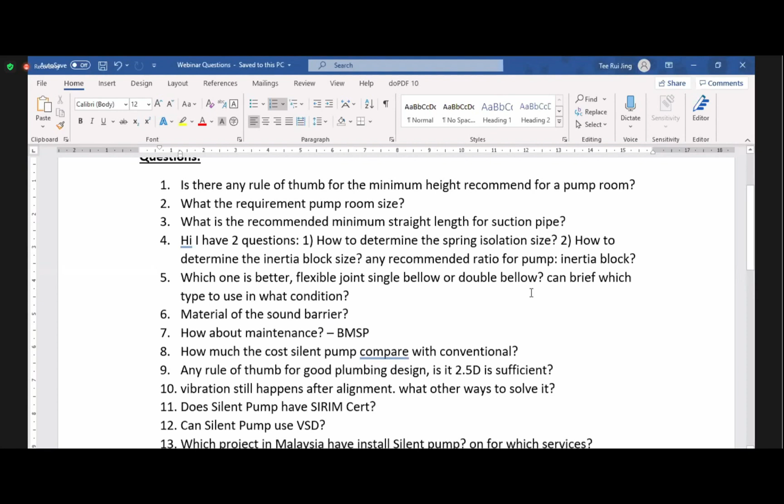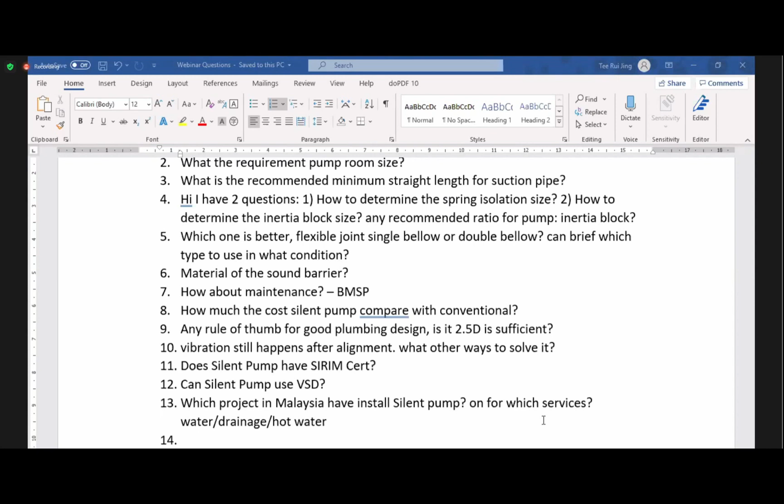Number 5, which one is better, flexible joint single bellow or double bellow? Single bellow is shorter than double bellows, and double bellows tend to have a bit more flexibility. If you ask me, it really depends. Single bellow, because of its shortness, is a bit more rigid. It is good if your pumps are not too big, but if your pumps are very, very big, then maybe a double bellow could be better.

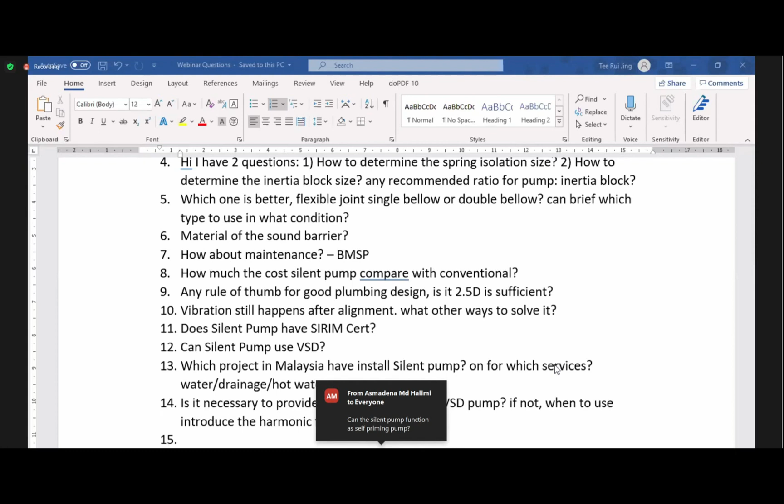I hope that gives you a little bit on what to look out for. As for the material of the sound barrier, there's many materials available—it could be foam, it could be some specialized material—depending on the treatment and how much dB you want to reduce. It could be cheap or expensive. Talk to the sound or acoustic people; they are able to advise you better. If you ask me, I can only advise you from a hi-fi point of view, but that's probably too expensive to talk about when it comes to a pump room.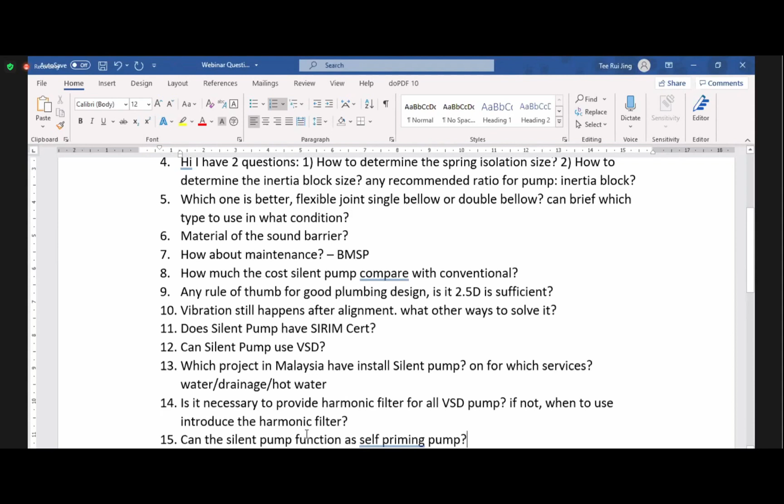Number 7, how about maintenance for the BMSP? Very good question. The BMSP, a submersible multistage pump, compared to a horizontal pump, does not require a lot of maintenance. There's no alignment required, no greasing or whatever. It is basically quite maintenance free when you put it inside the water tank. The only thing to look out for in the long run is water leakages inside or into the motor. If your water is clean, you usually should not have this issue. A submersible pump, even in borehole applications, can be used for a very long time without any maintenance, unlike a horizontal pump which needs regular maintenance or alignment. It is a full single close coupled kind of pump. So for now, it's like this.

Number 8, how much more does the silent pump cost compared with conventional? Yes, the BMSP will be a bit more expensive, but not so much more. It is what we call a mass manufactured pump, and that means that unlike a very specialized pump, this pump is quite commonly used.

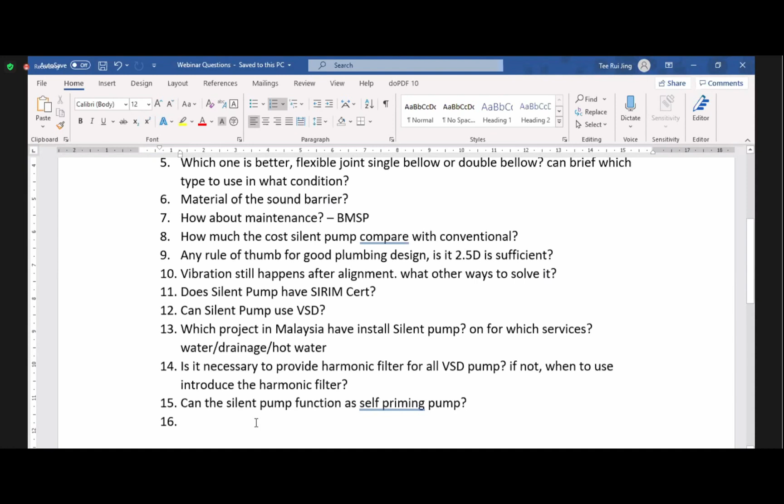Does the silent pump have SIRIM cert? At the moment, we are going to send it not for SIRIM, but for SPAN approval. SIRIM is usually for electrical products used at home. We do have some pumps with SIRIM cert, like our automatic pumps for homes, but normally for this type of pump used in projects, we will send it for SPAN certificate. So we are in the process of doing that.

Which project in Malaysia has installed the silent pump, and for which services? As I mentioned, we have just introduced this pump to the market. In Malaysia right now, we have not supplied it before, simply because it's new. But in other countries, for example, the installation you saw was in Taiwan. Also in China, we have done quite a lot of installations using these pumps for high-rise projects. So it has been proven, and I think there should be no issue using it in Malaysia at all.

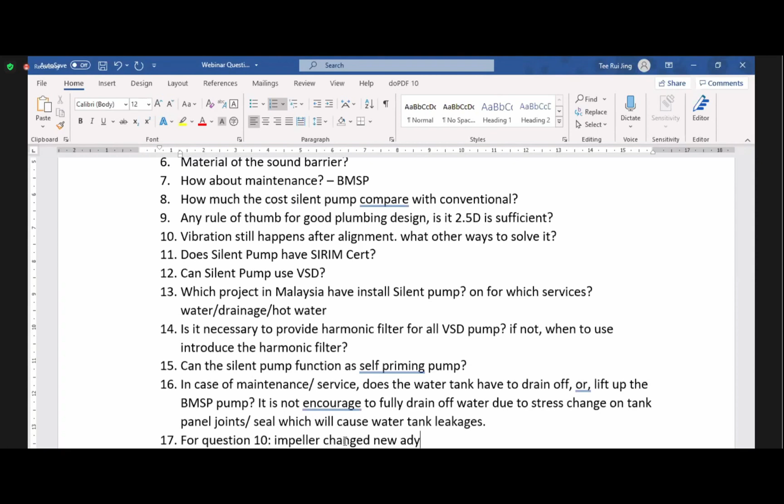It is not some exotic pump that requires a lot of special application or installation technique. It is quite a straightforward pump, so you should not have any problems using it in Malaysia at all.

Number 14: Is it necessary to provide a harmonic filter for all VSD pumps? If not, when should a harmonic filter be introduced?

I think in general, some brands of VSD have a low-level harmonic filter built in, and that basically solves the problem of harmonic currents generated from the VSD. In our case also, our VSDs have harmonic filters. That is why you do not hear this high pitch noise in our Ebara pump variable speed drive.

But you may have come across older installations, VSDs of different brands. I wouldn't say who, but we have come across this type of VSD where a high pitch noise is created. So to introduce a harmonic filter, yes, it can be introduced in the line.

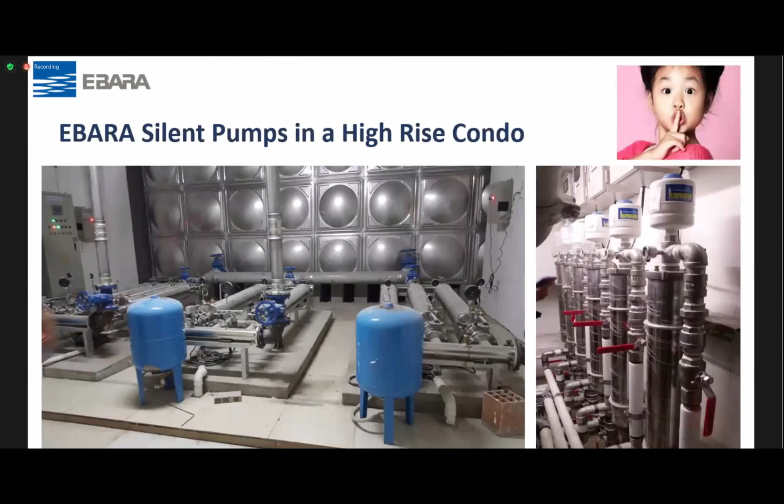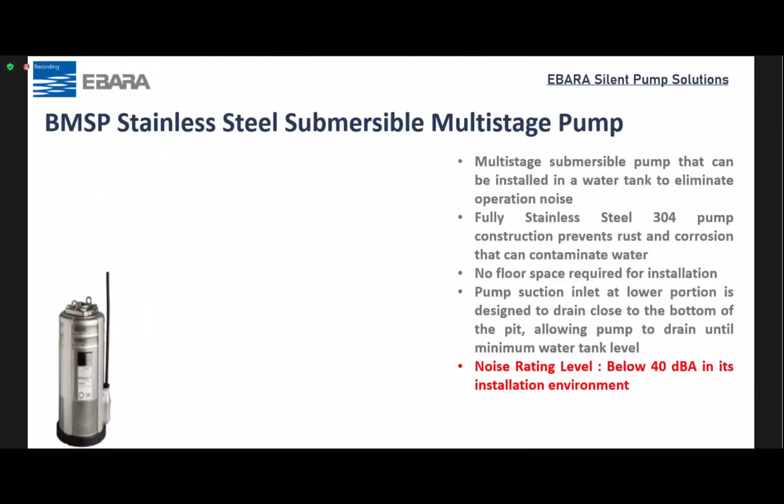The pumps will be inside the water tank, and the discharge pipe is connected to the top outlet. Usually you have one duty, one standby, so you can put your isolating valves and check valves on top, and then straight out. If you need to maintain the pump, just remove this part and pull the pump out with the pipe. The pump is not very heavy, so it's quite straightforward. You just need to ensure you create an access on the water tank to allow for the pumps to be installed and taken out.

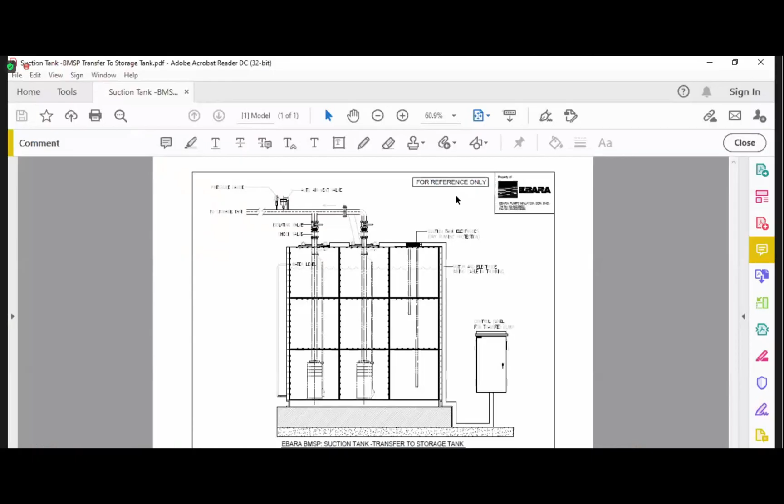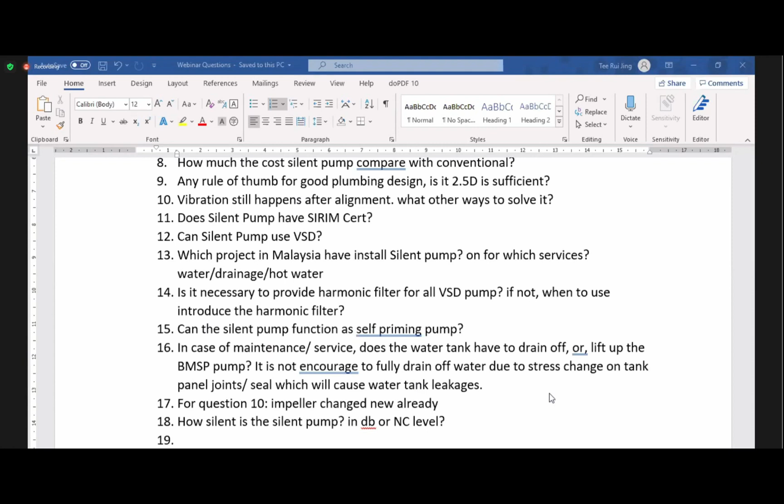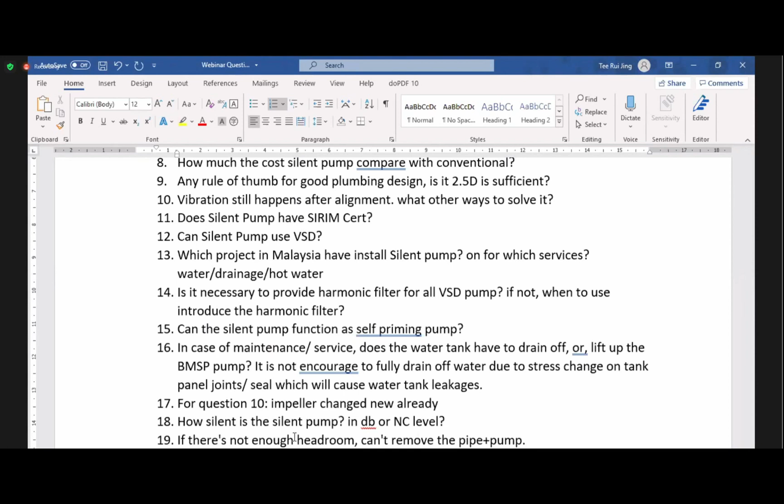Okay, number 17 for question 10. Impeller change new already, so how many? We really have to see, I'm not sure who actually did it or what was done. We need to study this, we don't have any separate record, or rather go to the site. But if you say the alignment has been done and the impeller has been changed and it's still vibrating, then probably you need to really look into what is causing it.

I believe the alignment may not have been done properly or very well, so try to do it again. Maybe the first time it wasn't done right. Alignment is what we call something that needs an experienced technician to do it, not anyone can do it. So if the alignment wasn't done properly, then you would also still get the same effect. But I cannot answer this question immediately as a solution, we need to actually see where the problem is.

Number 19: if there's not enough headroom, can't remove the pipe and pump. Agreed, so you probably have to allow for that, or you may have to make your pipe in a few sections. That could be one way to counter the effect of low headroom. Have the pipe in, let's say, 2 or 3 sections to the tank, and you can just dismantle section by section.

Number 18: how silent is a silent pump? It's as silent as silent. In short, if you put it inside the water tank, you will not be able to hear it at all, because your water tank, I presume, will be quite big, so you will not hear it because it is inside the tank. You will only hear what is around the water tank level. I only provide the meter. We say it's below 40 dB simply because even if you put an audio meter where you are sitting right now, I believe you would already get about 50 to 60 dB, unless you are in your house and it's very quiet. But I just measured my environment in the office, and it's already almost 60 to 70 dB.